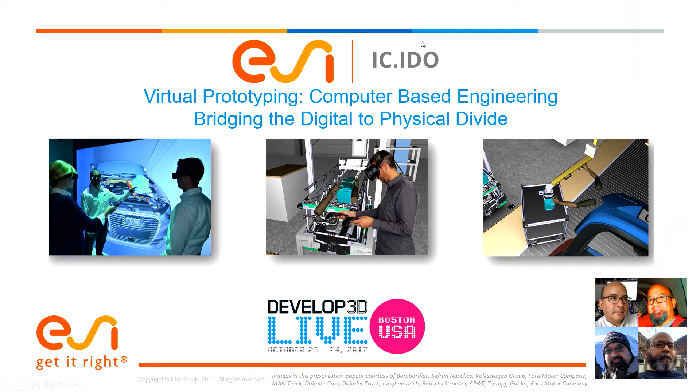That's me in the lower right-hand corner of the slide presentation. I put that up there so people can recognize me if I happen to shave my beard. It happened a few weeks ago where a guy I'd been working with for a few days did not recognize me after a month because I showed up with the beard, and he talked to me for like 30 minutes before he realized I'm the same dude.

All right, today what we're going to focus on is the idea that virtual prototyping and virtual reality can help bridge a digital divide that's been created because of our actually being too good at digital modeling. Now, if you think about the classical product development timeline and value stream, as we go from product concepts all the way out to production and sales and marketing of our products.

Normally what would happen in a traditional product development phase is that we would recognize during process engineering and development if there were any things in a product design that made it difficult to assemble, difficult to build. We might have to go back to the drawing board and redesign the way we build these products. As we go further along, as we start developing tools or prototyping and piloting our manufacturing facilities, we have to go further and further back into our designs to fix things that might have been missed.

And terrible things that could happen is that if we actually go to production and our products hit the market and we find something about that design that makes it inaccessible, unmanufacturable, unserviceable, and we try to go all the way back to product engineering, that's very, very expensive.

I know today we've been focusing on how computer design has really allowed people to do away with practical prototyping. That's a common theme at these types of shows. People say digital engineering and digital manufacturing have allowed us to go away from having these practical prototypes, practical proof builds of our actual tools. So now they were talking about no more clay vehicles, no more wood models, no more prototypes, no more pilot plants, no more piloting facilities, proof tools, and that's been generally a good thing.

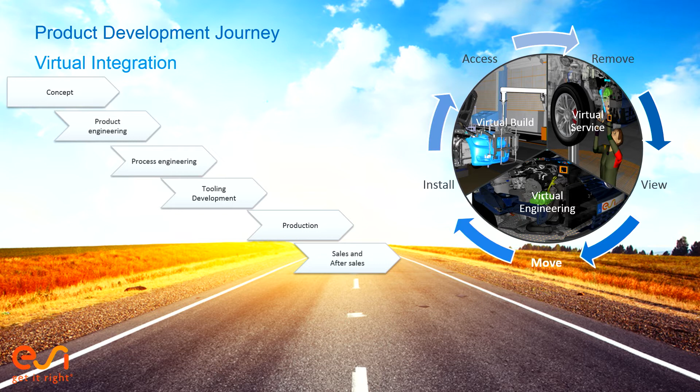So now once that prototype goes away and we start thinking about concurrent engineering, what we want to do is help people use VR to do virtual product integration, virtual build, and virtual service of the products that they want to take to market. So the first thing that I want to throw up there as an idea is VR as a tool, and people talk about VR and AR as if it's just one thing.

And the analogy I like to use is, if we roll back the clock, you remember when computers first started doing 8-bit to 16-bit to 64-bit color. And somebody said to you, oh, I heard 64-bit color is now a thing, and apparently you could use Microsoft Paint. That's maybe a multi-bit color tool. Can it do the same things that Photoshop does? Because I heard it's also a color computer program.

And right off the bat, people would say, no, you can't use Photoshop and Paint interchangeably. Now, I know there are people who have YouTube channels that would argue that you can do the same thing. VR is very much the same kind of technology, that we don't want to use VR as just a single placeholder for all of these technologies, all of these tools that bring things to virtual reality, to immersion.

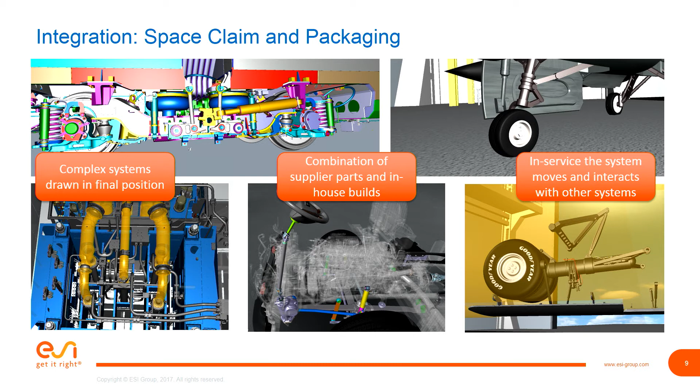So one area that's a challenge for us is this idea of product integration, space claim and packaging. So we want to use VR to make these decisions. And when we're talking about integration challenges, we have to think about the size and the complexities of many of these models. So we're talking about very large models, millions and millions of polygons of complex models that we want to be able to integrate with each other that chances are coming from different CAD systems, different engineers, different designers, and I want to integrate the product and the environment and the behavior, the processes of putting that product together.

All right, so this is just an animated GIF of one of our customers doing an axle validation, and what they did is they integrated all of the moving bits and the moving parts of this steering assembly for the front of the car, and what we're looking at is a travel of the suspension relative to all the hoses and the wires and the cables that go into that device, into that system.

And the thing is that when you think about what engineers do, we draw all of our pictures in end position, or maybe we show them in one extreme or the other. But in fact, there's an infinite number of different combinations of positions of that assembly, and we want to make sure that those hoses and wires are appropriate and they're the right length.

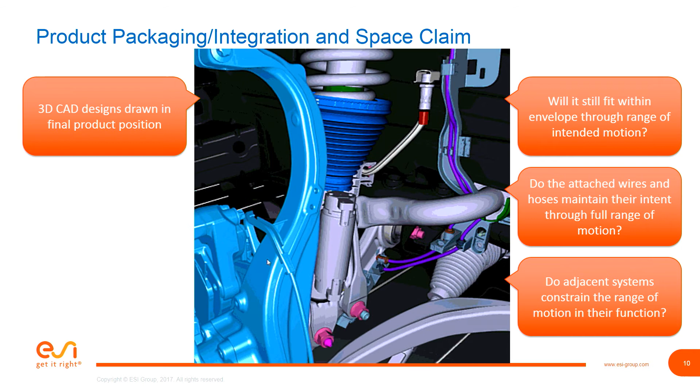So our customers are using VR so that they can bring that CAD data in, they can make it behave physically like the product's going to in the end use, and they go into VR and they grab onto that thing and they shake it up and down and they turn it left and right to see if those hoses are in fact going to pinch or bind or cause any problems.

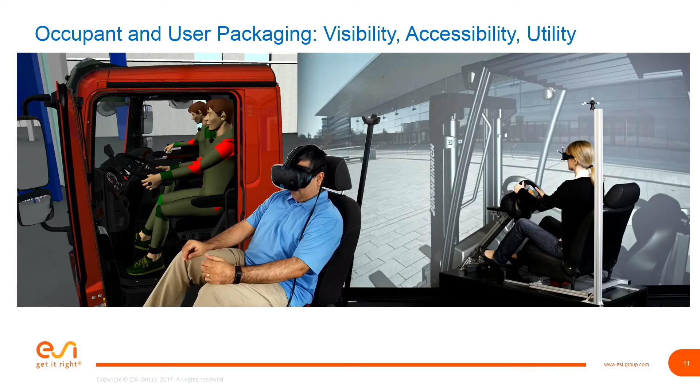Another challenge is occupant packaging, visibility, accessibility, and utility. So you want to use VR for that so that people can actually experience their products. So in this example, we have people using virtual reality, in this case a mixed reality situation where they have a projector doing projected VR, and they're reaching through with those little hand things, what they used to do with wooden models.

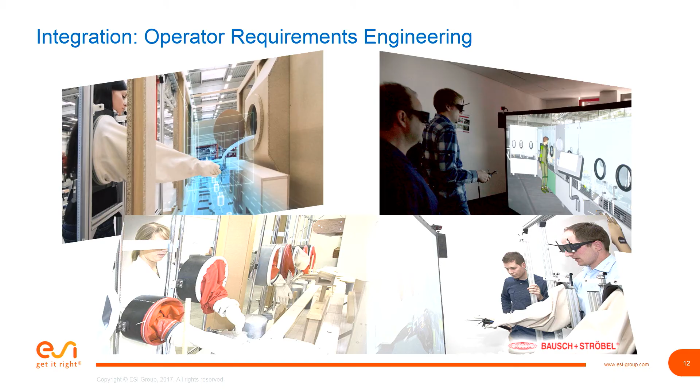So this is a customer of ours, Bausch and Strobel, that used to use wooden models to mock up all of their layouts. And every time they would try a new layout, someone would have to take the carpentry team and cut that thing apart and put it together and try it again in another configuration. But with VR, we could actually just load in new data or move that data in space and try it out a different way.

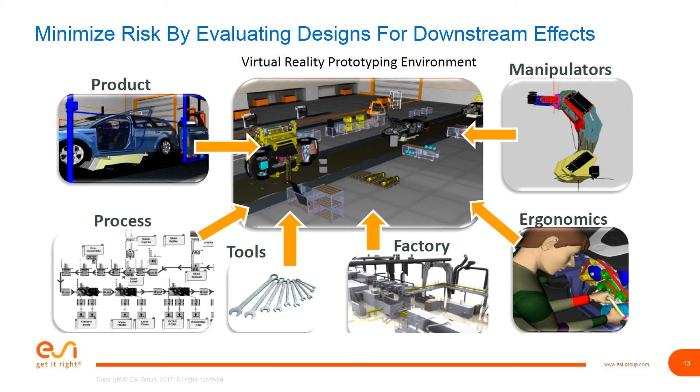So that allows us to use VR to minimize the risk that we have in product design by evaluating the decisions that we make for all of those downstream effects. We can evaluate our product, the process, and how people interact with our product during those processes, where that process might be everyday use, it might be assembly, and it might be even service after sales.

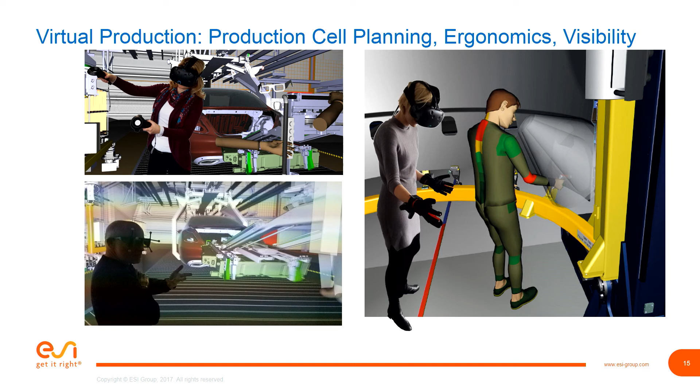So these are some more examples that we have here of where we're trying to now use VR to merge the first-person experience that we have with our products with the third-person experience that you have with a mannequin. So what we're able to do in VR in this case is that we could record motions that a person was doing in VR, and we could map those same motions to a digital mannequin. So this is a mannequin that we're introducing.

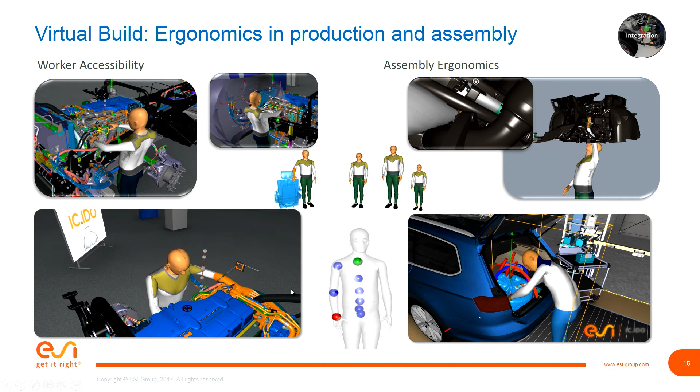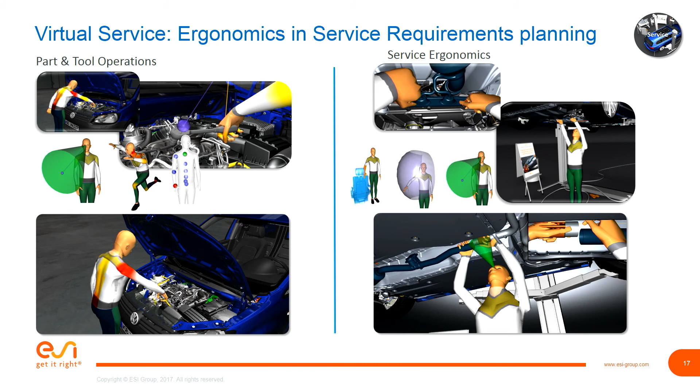This is the Human Solutions RAMSIS mannequin, and we're able to capture our virtual reality behaviors and the virtual reality physics and play that back through the mannequin so that we can see if I did some action from my point of view, what would that look like for different size people, for different populations, throughout the wide range of databases that are available for people to use.

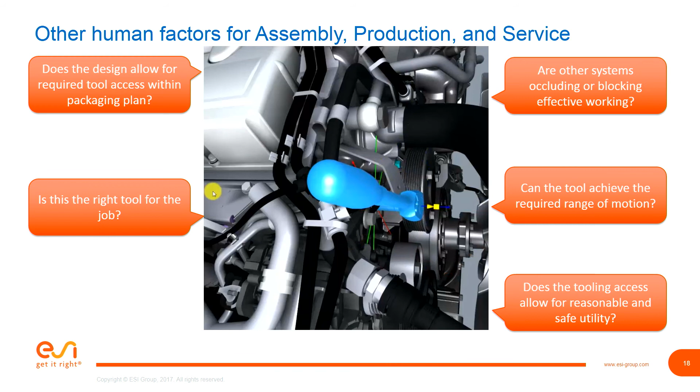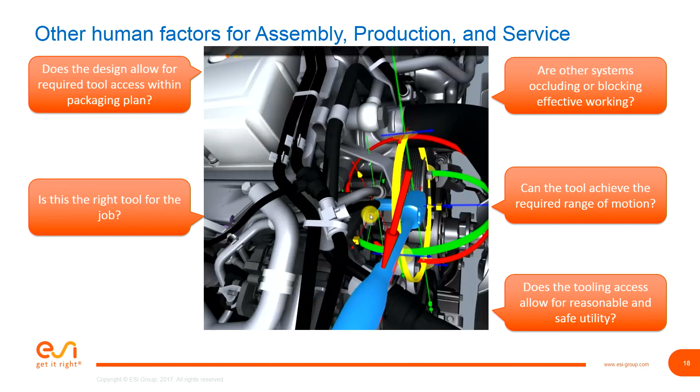In this case, you could use VR to see whether or not the tools that I would use to loosen a bolt in this engine assembly would in fact cause collision with any of the hoses and the other assemblies inside that area. And you could see when that wrench moves up and down, we're doing real-time collision handling and collision detection and even elastic motion of those hoses to see what can fit and what won't fit when we try to service that car.

Here we are attaching and detaching a sensor to the exhaust assembly and trying to see, can my hand tools get in there for the right amount of work? So where we try to apply virtual reality to engineering is really at this confluence of product, the people, and the processes that make up our product as we try to bring it to market.

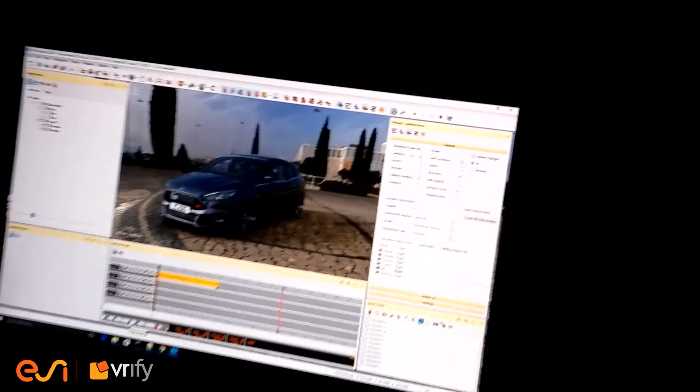This is a video that I took live where we were streaming a virtual reality review from a laptop computer over a wireless signal to my Samsung Galaxy 8 phone. Sorry about my shaky hands there, a little bit more stable here. But we are actually streaming the VR experience, omnidirectional 360 view, to that phone so that people could have VR experiences wirelessly. And that's it.